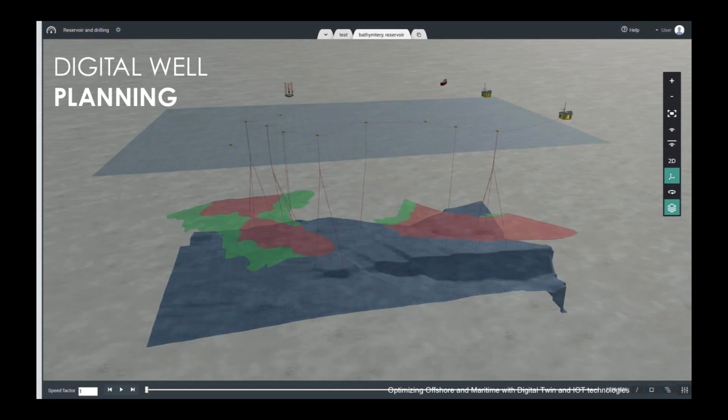Then your field development - basically being able to create or access a digital toolkit, a toolbox of information, smart data assets that you can use within your field planning to create this smart digital field. And ultimately using tablets, accessing through your cloud-based environment, access to other documents associated with your equipment, as well as live data like IoT data. So those are some of the areas we're focusing our attention on in terms of building the software.

And we're working with Aegex, of course, to make those available within their intrinsically safe technology, whether it's on a tablet or connecting to the IoT devices.

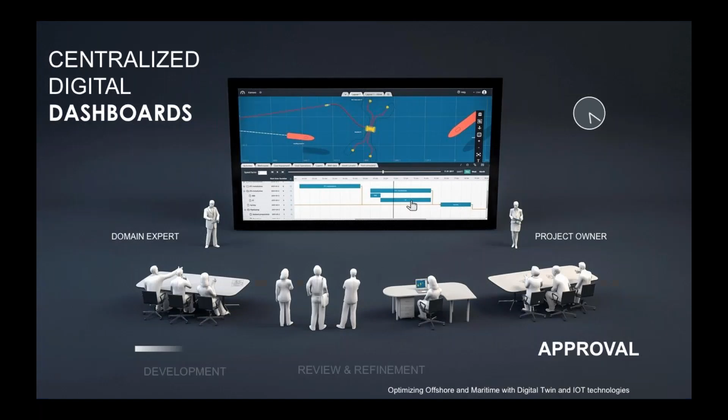So I mentioned centralized digital dashboards. What that means is being able to access all the information from a configured environment. The dashboard of the digital twin presents the information you need when you need it, whether it's a domain specialist providing specialized knowledge for a well planning or field development process, building a new riser, or in the post-project phase when doing maintenance or installation work that requires bringing everybody together.

So putting everybody, if you like, into the same digital room to access the digital twin becomes the value proposition. And that's where the collaboration component comes in. So your operators need to understand what your EPC partners are doing as they are building out or doing the contract work. What about your marine operations? How is that aligning, as well as with your subsea production system partners across the globe?

So the benefit of having a secure cloud-based solution is that it gives you, out of the box, access to this collaborative environment. Just in general, the short-term benefits of approaching your offshore process through the digital twin story - one of the major things, of course, is reducing costs, because you're able to make decisions more quickly.

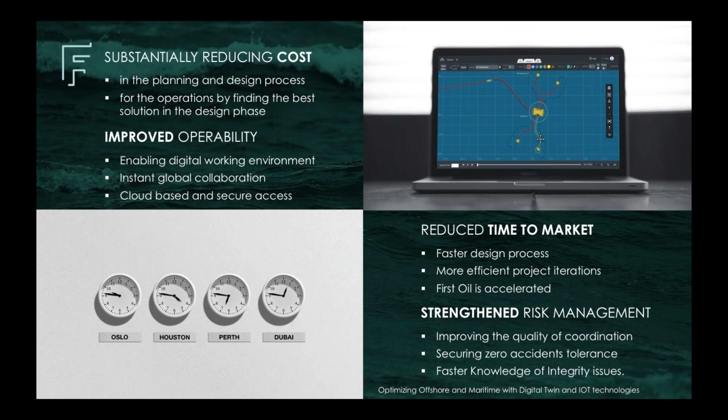Risk management is also key. You want to make sure the documents you're using are the correct document, the sole version of the truth, at any point in time - whether that's at the early stage of the project or all the way into operations when you need to pull up a P&ID associated with a particular piece of equipment. Making sure all that information is available at your fingertips in the cloud at any time is critical.

And that's what the digital twin gives you. So stepping back a little bit, I'm going to talk about how you create the digital twin. What does that look like?

You start with what data do you have - and that can be all sorts of things in this industry. It can be just your existing archives, mapping data from ArcGIS systems. You may have huge amounts of information already in a GIS server or available through third-party information.

There's lots of information also online that you can access - things like subsea bathymetry data, the seafloor data, that you want to use to make sure you're accurately positioning equipment on the seabed so you can make accurate decisions about the length of a pipe and everything else associated with it.

Reservoir maps, for your well planning, existing well paths, your P&IDs, your as-builts, and of course also the actual equipment itself, the asset data. And that last one is a very critical component, because even if you have all this data, if your assets, your new equipment, isn't intelligent, it becomes of very little use.

So one of the things we do as FutureOn is spend a lot of time making assets smart. In this case, this is a manifold that's being dragged into a field, but that manifold can be fully configured to the exact specifications it would have in real life. That's when it starts to become the twin of the real manifold - it starts to represent the physical characteristics of the piece of equipment you're looking to use in that environment.

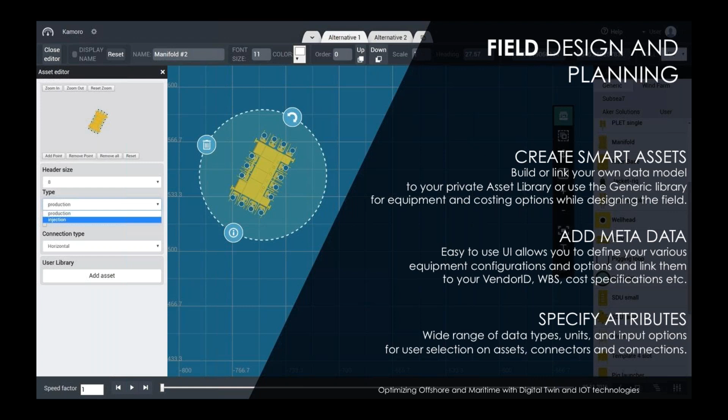That can contain technical information as well as things like costing and other attributes that are important as part of the decision-making process. Costing in a project stage is always a question you have. So the digital twin, as you pull it together, at any point during the planning stage, you can understand exactly what your cost is going to be - not just for the equipment itself, but for the project as a whole.

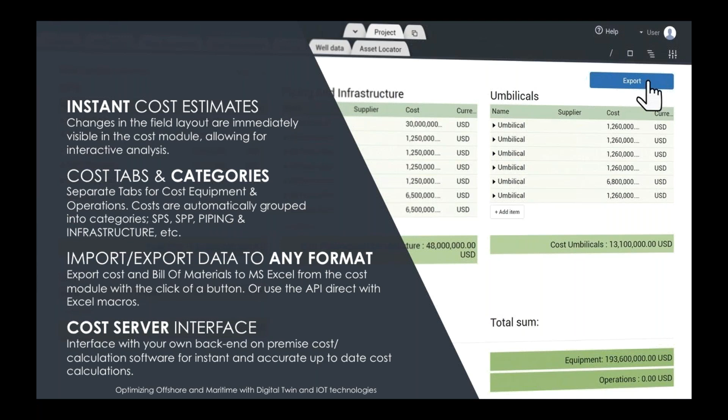So you know in this much more competitive environment whether a field you're considering is going to be cost effective at a very early stage. It's not something you want to wait until later to send back to your cost estimating team. You'll know very closely at the very early stage whether this project is viable. Given the competitive nature of the world right now, that's a very critical component.

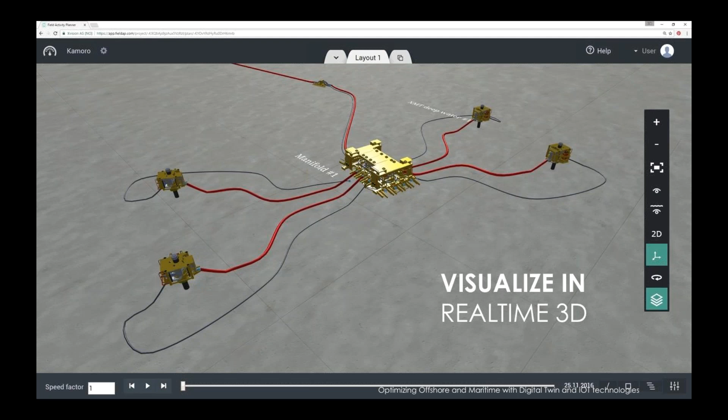In a digital twin environment, you often want to be able to work in 3D - the real-time nature of presenting content in 3D, having smart assets not just as a schematic but as a true 3D representation of the field itself, whether on the sea floor, under the floor, or on the surface. Being able to visualize exactly how things look in real time helps people make decisions - it allows you to see something you'd otherwise only see on a spreadsheet, and you can use alerts and other things to present conditions you may need to react to.

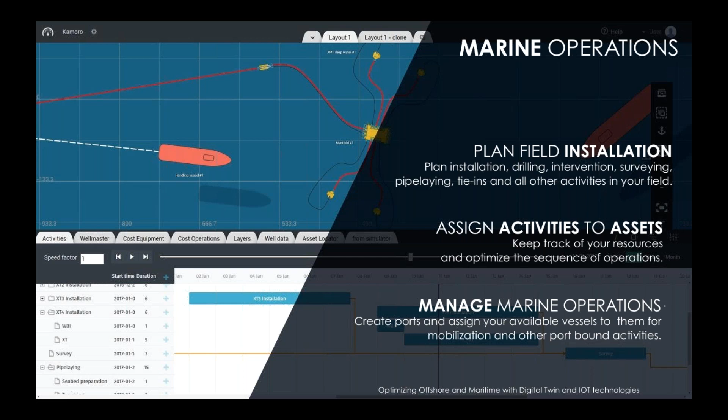On marine operations, being able to not just plan your installation of a field, or plan a maintenance process, or even plan a decommissioning, is also about seeing that entire process come to life through animations - to see where you may have conflicts in marine operations, or a period where certain vessels at a high day rate are idle because the planning process hasn't come together as expected, a vessel has arrived early, or something is missing during the marine operations stage. It's all about being more efficient and saving money at every part of the process as you go through field development.

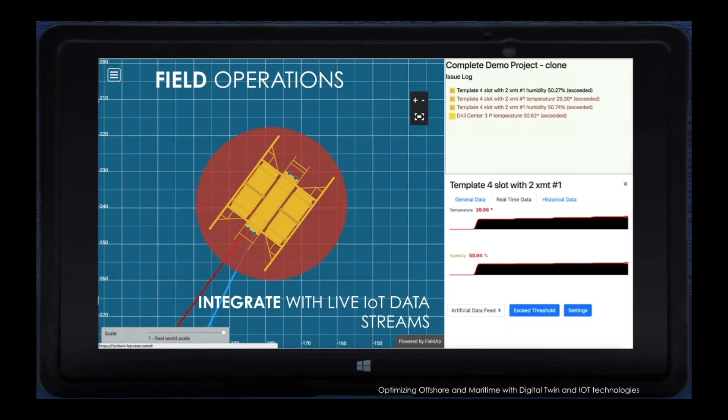And then finally, in the operations stage, this is a way we represent real-time data coming in from an IoT device. In this case, this could be an Aegex IoT device detecting both temperature and humidity, identifying very quickly and zooming you into a particular piece of equipment that's exceeded a certain threshold of operation. And because you've created everything digitally, with all the metadata, intelligence, and specifications, you can respond immediately and pull up all the necessary specifications, data sheets, P&IDs, anything you need to react to an event in the field during operations.

But I do have a couple of brief use cases I want to talk about. One is field layout optimization. One of our clients is a global oil services company. Traditionally, they had a very siloed workflow. They used fairly basic tools to do this kind of work, Visio and Microsoft Paint, those kind of tools, and Excel, which were not connected together.

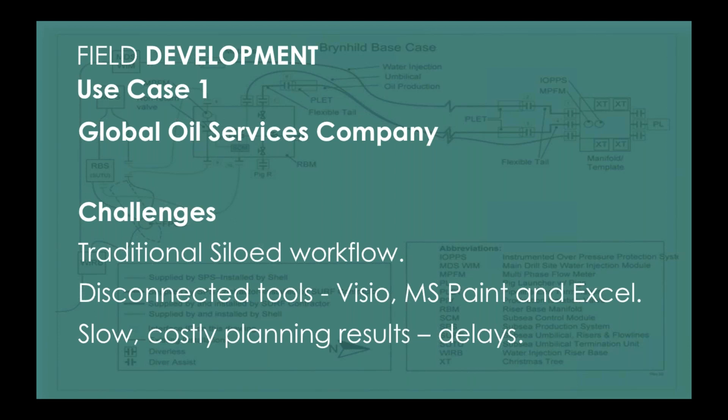They were simply just tools, and then when meetings came together, everything was printed out with lots of paper on the table, which created a very slow, laborious process looking something along these lines, where you have all these different silos of information, and everything takes a long time to get approved.

So today, now they work within the digital twin concept. Everything is brought together into a single environment. This could be on a large screen or on a tablet, like an Aegex tablet. It would depend on the context of the user, and being able to see at any time any data associated with the project they're working on.

They work everything in the cloud. If anybody wants to see a cost, immediately they can have access to it. You can control who has access to the cost, and who has the ability to make changes, updates, or revisions to the data. But the point is, the digital twin provides the mechanism to allow everybody to access the true project at any time, from anywhere, on any device.

And some of the savings are incredible. It tends to be a little bit based on the size of the project, but projects that in the past, to get to an EPC stage, may have taken several months, can be rapidly conceptualized in maybe a day or a couple of days, and then a process would be put together to turn that into a bid, of course.

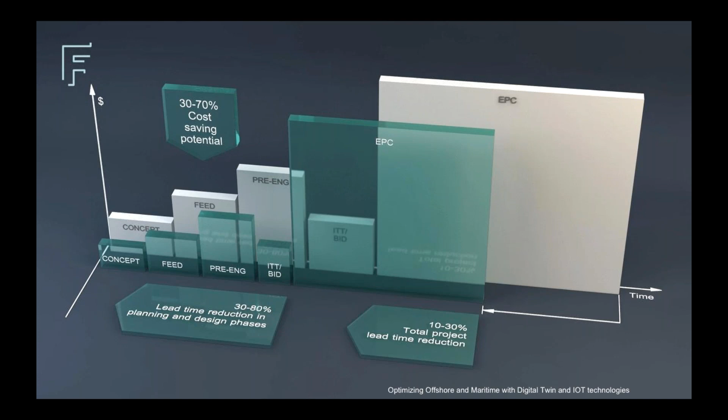So the second use case I'd like to talk about is around a regional operator around marine operations. This is actually a client we've had for some time, one of our earlier clients, and one of the reasons why we actually developed this software.

They had a lot of planning conflicts when the vessels were being planned out. There was no easy way to track scheduling, how they did their scheduling. They had issues around safety zones and the size of safety zones, so they would often run into issues and conflicts with their safety zones. There was a lack of data available to them, so they didn't necessarily know who was available at what time, and that resulted in idle vessels and huge costs associated with those. So their old system, their Gantt charts and everything else, really didn't cut it.

And so they were able to build a digital field, a digital twin of their field, which they could then completely visualize in the cloud in real time and make those decisions. So they could bring in vessels, 3D versions of their vessels, accessing live information about the location of those vessels, anything else associated with them, and be able to pre-plan, as well as see in real time during the actual marine operation phase how efficient they're running and how close they are to plan.

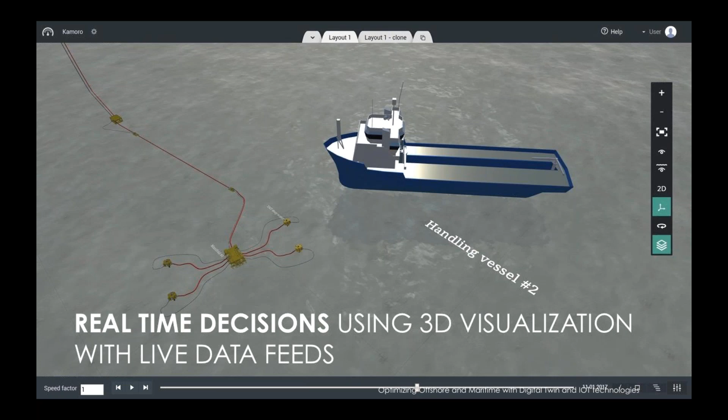So that's a real success story on the marine operations side. They've saved a huge amount of money because of the day rate costs they managed to reduce. Of course, there's a lot of risk associated with planning these kind of events and being able to intervene prior to the collision of a vessel with another, or other catastrophic issues that become almost unquantifiable, but certainly the liabilities associated with it have been reduced significantly, with increased accountability.

They know where more stuff is at any time. There's a concept called custody transfer you may be aware of, where there is a huge amount of loss in the industry because of lack of accountability. So having that insight and knowing when fluids, oil, is being loaded and offloaded, what the quantity is, everything else, is an area they absolutely are interested in exploring further. So that's just a very brief introduction to what we call the digital twin.

I talked about creating a twin, using digital tools, doing everything in the cloud in a collaborative environment, working with your employees as well as your partners and other specialists to bring everything together quickly to save you time and money and reduce your risk.